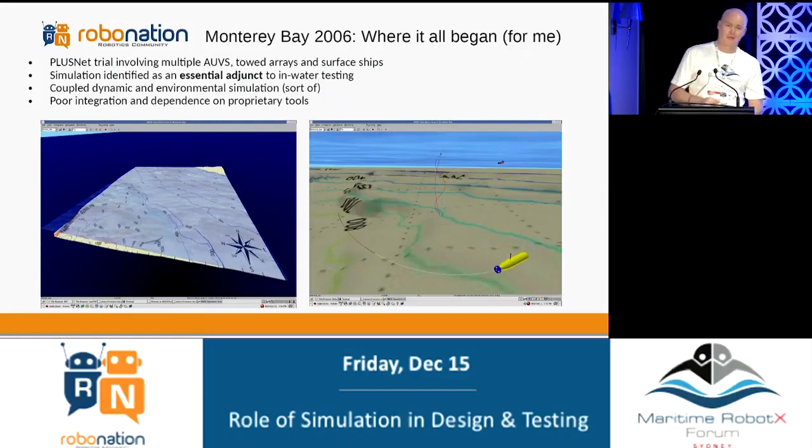The dynamics for the towed array was done separately in a MATLAB script supplied by really smart guys from Vehicle Control Technologies in Virginia. The acoustics, done by people like Henrik and myself, was done in clunky Fortran code that was plugged in sideways into the whole thing. And so basically there was a fairly low level of integration.

So moving forward to today, it is an entirely different situation. We have fantastic free software available just by downloading it. And we have other fabulous developments, GPUs, driven by gamers pushing for cheap teraflops. So you can do now in real time what used to be done offline. There are also very fine libraries like the Bullet Physics Library, OpenCV for machine vision, NVIDIA OptiX, Blender, mature middleware such as ROS, MOOS.

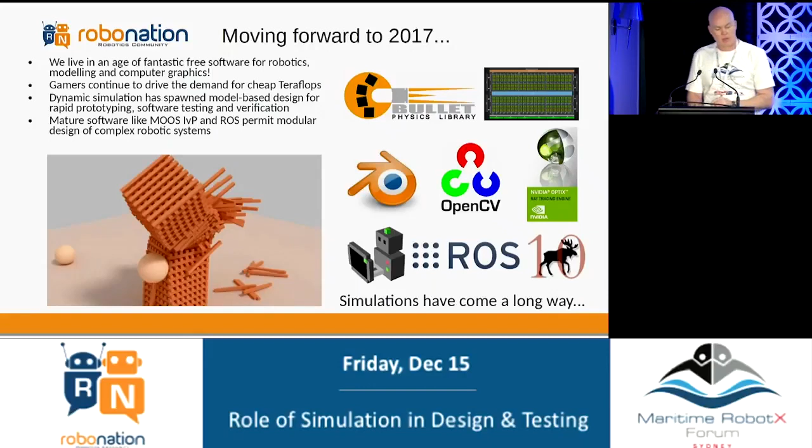And that little robot MORSE down the left-hand side there is really what I'm going to focus on. It's the modular open robot simulator engine, a project out of France. There are the main people responsible for it. This information is copied off the MORSE website, so you can read that at your leisure. It's very heavily Python-oriented, which is great. Python's a very flexible, powerful language.

But out of the box, if you look at the set of default robots available, you're seeing maybe some quadcopters and ground vehicles. Not really that many maritime vehicles. There is a submarine there, and to my horror, when I first looked at MORSE, one of the things people were doing was switching off gravity. Saying we're just bobbing around with neutral buoyancy, what do we need gravity for? Don't do that, because gravity is very important, it turns out.

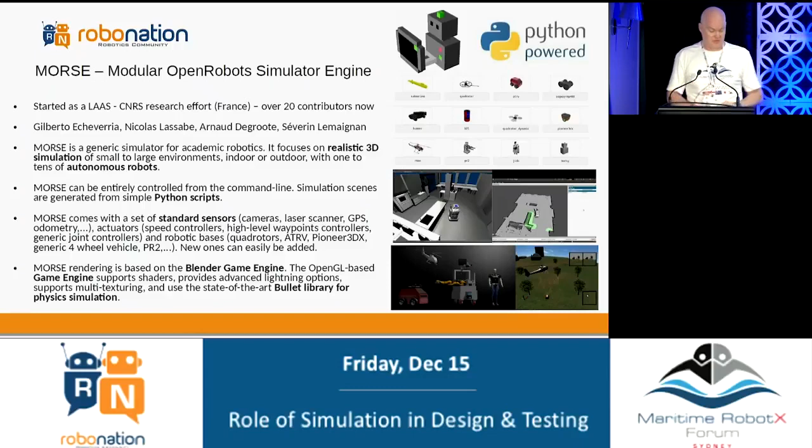Okay, so when you get into Morse and customize it, as we have over the last 6 months, you can really make things realistic. So this is a little bit of a simulation of Bluefin 21, and okay, it's nice to look at, it's a bit of eye candy, but it's actually a very sophisticated simulation of that vehicle, with all of the instruments instantiated: INS, IMU, forward-looking sonar.

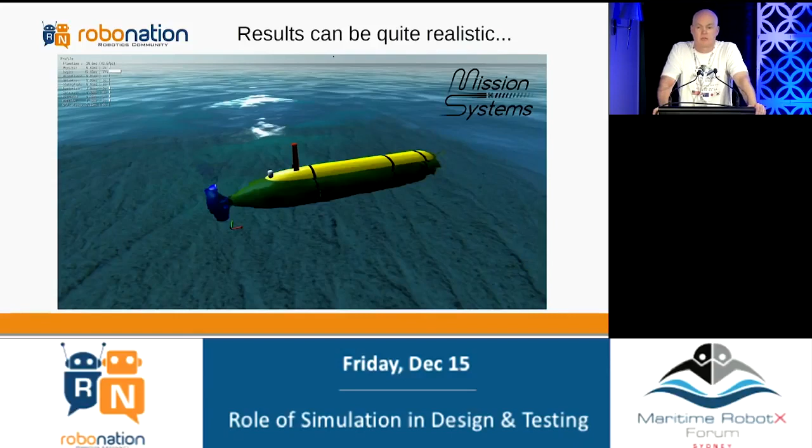It even has a GPU-accelerated side-scan model which generates about 1 million rays per ping at 50 hertz. And I'll say a little bit more about that later. The ocean module is a procedural GLSL texture which can be arranged to have the spectrum corresponding to virtually any sea state. So a very sophisticated simulation.

Some of the other vehicles we've been working on: down the lower left there, you've got the Hydromea Vertex from those crazy guys at Hydromea in EPFL Switzerland, Alex Bahr and Felix Schill. So we're helping them with some trajectory generation for that vehicle. It's got 5 thrusters, tiny vehicle, only 70 centimetres long.

Then you have the Deep Ray vehicle. If you're familiar with the Scripps 6-metre flying wing glider, this is kind of an Australian knockoff, which I started when I was still working for Defence. It's designed, though, to go much faster than the Scripps vehicle, and it's rated to 1,500 metres.

Then you have a generic RIB there, which can be driven autonomously. It's got an articulated outboard with the force vector being applied through the propeller. And all of these vehicles really use a distributed buoyancy model, which we've perfected in Mission Systems. So essentially, on another layer of the 3D design, you just orient these spheres to represent roughly the distribution of buoyancy and mass, and you have very realistic surface movements for the vehicle, which is crucial if you are interested in things like deployment recovery.

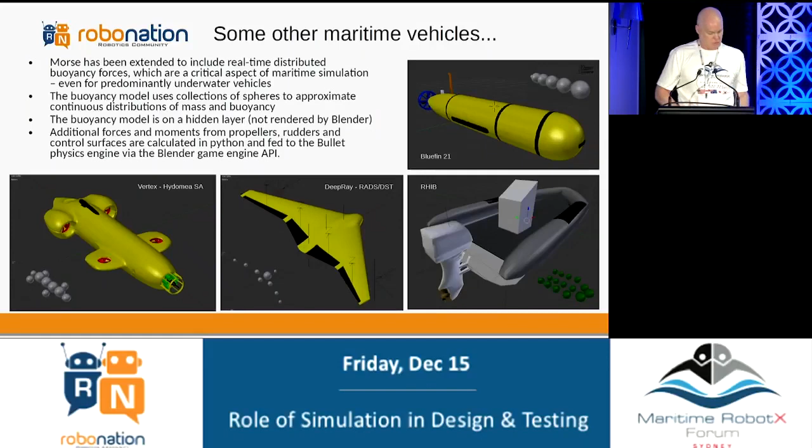Okay, so switching off gravity, no, don't do that. Use simulated buoyancy instead. So this is roughly how Morse works. The Blender game engine gives you the hooks to get in and run this loop. So there is a main which does some system level stuff, and then you get time slices essentially for each of the sensors and actuators. And I've got a little bit of example code there in Python.

So essentially on the left-hand side you have the actual simulation going on, and the great thing about this is it's pretty much middleware agnostic. So on the right-hand side you can put whatever middleware you like. It supports sockets, ROS, YARP, PocoLibs, which I hadn't heard of, MOOS of course, HLA, and a text mode. Essentially, one side communicates with the other by just sending data through local data maps. So it's kind of a decoupled architecture, and all you really need to implement a middleware is the bindings.

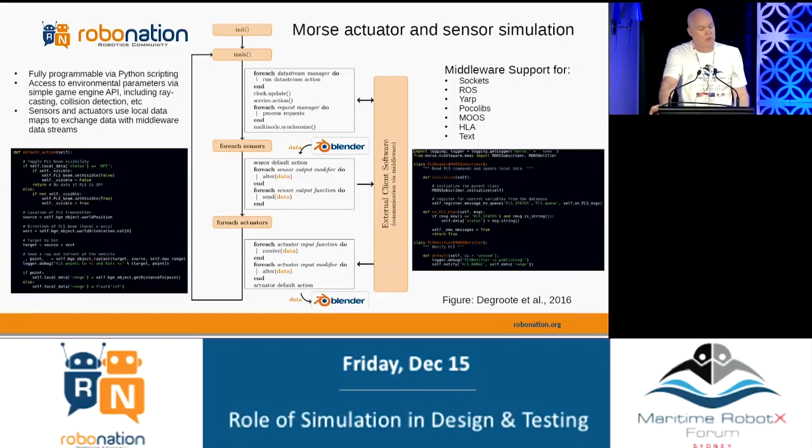So thanks go to Sard at MIT for the absolutely fabulous work that he did on PyMOOS, and of course there's PyROS and all kinds of other bindings. So just quickly to look at how you would implement a dynamic simulation, again looking at the glider. So we have the force diagram there, so constant velocity, all of those forces are balanced, okay?

In this case, the parameters, the manoeuvring parameters, if you like, came from CFD that was done at the Australian Maritime College by Max Haas, and they were fed into the Python code. So the nonlinear drags and lifts are calculated in real time for a given angle of attack, and then you essentially just stick those values into vectors. And in the Blender game engine, it's simply a case of apply force, apply torque. It's a very simple API.

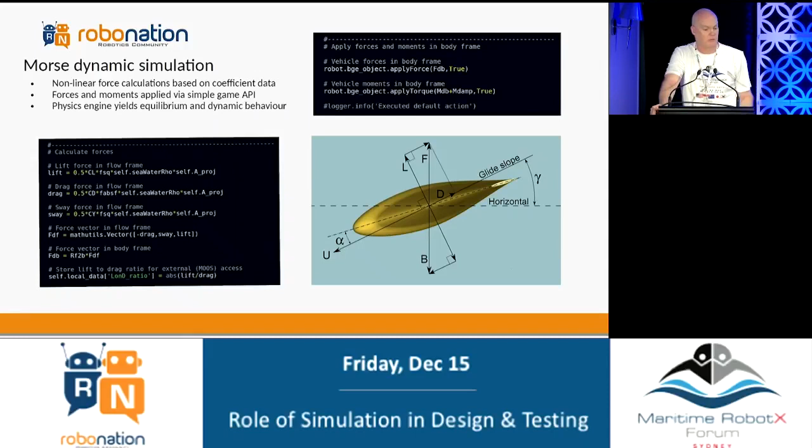And when you run the simulation, that glider just flies like a glider. And the motion is extremely realistic. We've also implemented things like variable buoyancy trim tanks, and it's really a very sophisticated model.

Lastly, in the way of sensor simulation, something we're doing for the Australian Navy, perhaps as a training tool for mine countermeasures, is a GPU-accelerated sonar simulator. So on the left-hand side there you have the simulated virtual Bluefin 21 with a virtual side scan sonar, and it's running along the bottom in a constant altitude mode.

And on the right-hand side there is basically the side scan data that's being spat out in real time. So as I said, about a million rays per ping at 50 hertz there. And all of the beam pattern effects and shadowing is done in real time in OptiX. And we've shown these images to people who've spent their lives looking at side scan, and they say, that's looking pretty close to the real thing.

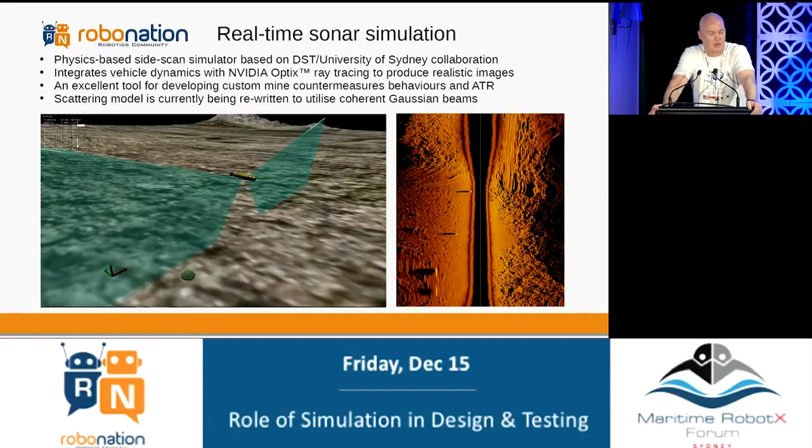So that project came out of a collaboration that I started with Sydney University, actually with Dave Johnson as it happens, and we're going to license that technology back from the university. Okay, so in conclusion, where I think all of this is headed is more and more realism in simulations. So as we get more computing power, mostly GPU enabled, we're going to be able to get closer to reality, okay? So systems like Morse achieve this very high level of integration now.

So you've got the physics engine. We don't yet have the CFD in real time in the simulation, but maybe, who knows, in 20 or 30 years' time, you can design your vehicle, plonk it in the virtual ocean, and everything will work. But until then, we're doing CFD offline and writing the algorithms to run.

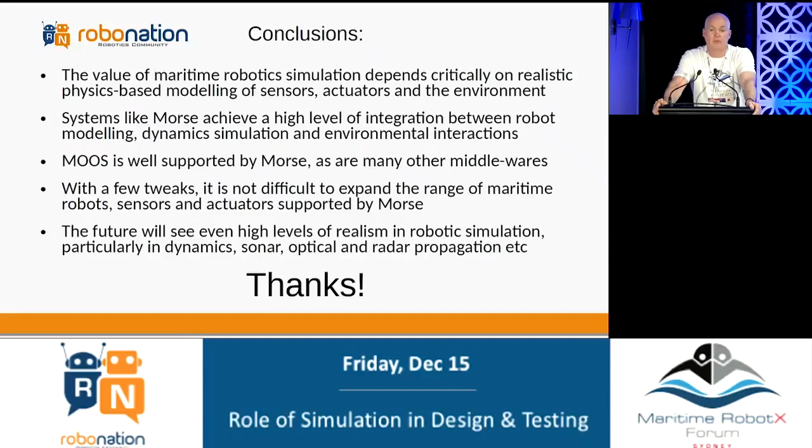So when I was creating my simulator for the RobotX challenge, one of the difficulties I had was getting the mesh of the WAM-V model and then determining the volume of displaced water on an uneven water surface. David Battle, you seem to have a model of doing this. How do you go about determining the amount of displaced volume of water on an uneven ocean surface? And is that open source software?

Yeah, okay. So the model we have is pretty flexible, and it's just a little Python class that looks at your mesh model, and it looks at the hidden layer with the distribution of spheres. Essentially you can set the trim of the vehicle to any height, but those spheres just represent empty volumes and correspond to buoyancy force. So you play with it a little bit, you distribute the spheres where the buoyancy should be, and it just works. There's no configuration beyond that.

And as for that being open source, I think we're thinking along the lines of maybe contributing that back into the Morse code base, because Morse, out of the box, as I said, at the moment is a little weak in maritime, but I think we can fix that pretty quickly. I think we'll probably end up contributing that to the code base. Yeah. Cool. Yeah, that would be valuable.